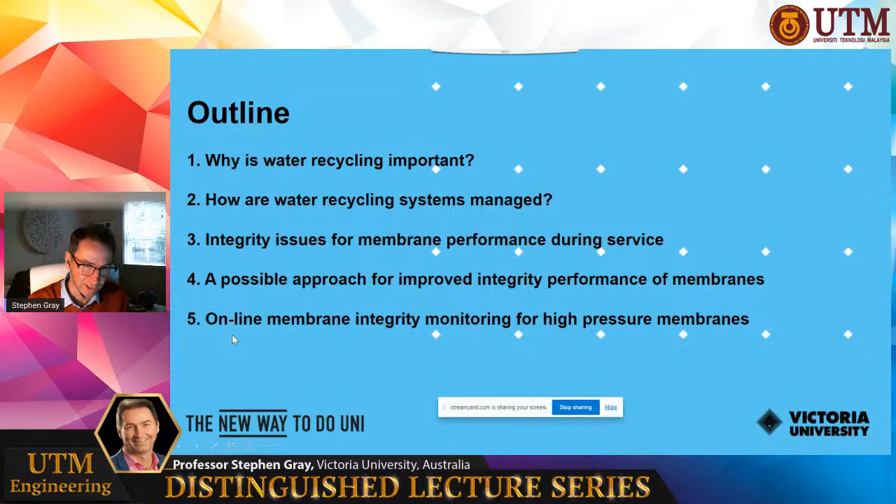So why is water recycling important?

This is the average temperature across Australia over a number of years. You can see from about the 1960s, the blue line shows the temperature across Australia has been increasing. If we do some modelling including greenhouse gas emissions, we get the red line. Without them, we get the dotted blue line. So there's a strong correlation between greenhouse gas warming of Australia and the planet. This data goes up to the year 2000, but more recent data shows it's actually increasing beyond that. We all understand the world is getting a bit hotter, but there's data that underlines that.

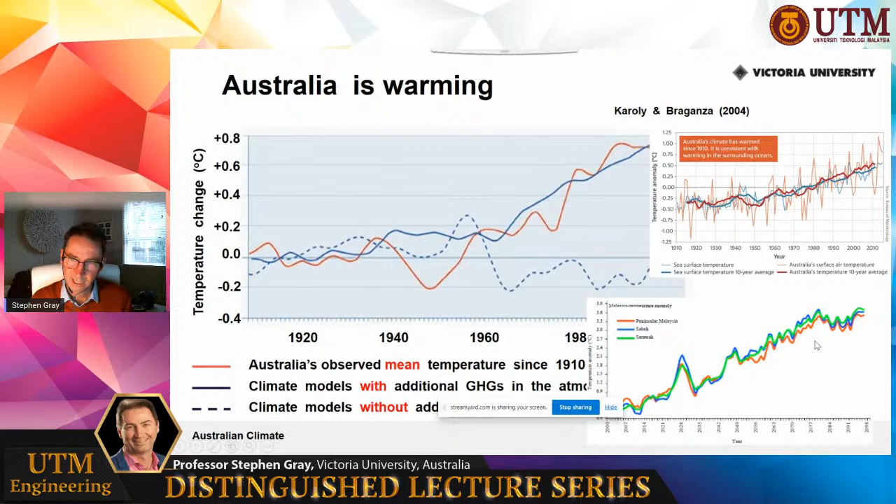If you're in Malaysia, you can see the same sorts of trends occurring, increasing temperature through the years. So we know that the climate of the world is changing.

For Australia, what that means is that the red areas are getting drier and the blue areas are getting wetter. Not everywhere gets dry, but certainly in Australia, all the locations with yellow dots are large urban cities, our main cities, and they're all in regions that are getting drier. So for Australia, climate change means we have less water available. This data goes up to 2002, but with more recent data, shown in green and brown instead of red and blue, you can still see the brown areas are getting drier. Same trend with more recent data.

One outcome of that is we get less rainfall in these areas. This is some data from Perth. You can see what's happened to rainfall there - from about the late 1990s, they've had a drop in rainfall of about 14%, and more recently a drop of 21%, and it might have even dropped again. This data is a little bit old.

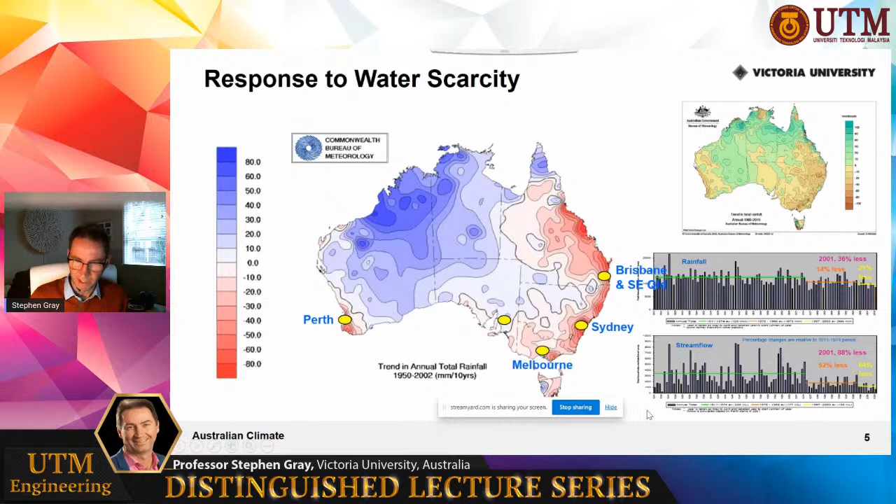What that means in terms of runoff into the catchments, our reservoirs that we've traditionally relied on for water, is that a 14% drop in rainfall correlates to a drop of 52% in terms of water flowing into the reservoir, and more recently a drop of 64%. So our sources of water are becoming less reliable. That's an extreme case, but similar things are happening across Australia in terms of the reliability of our reservoirs.

The response to that, around 2010, a bit before and after, is that Australia has built a lot of seawater desalination plants at all the main capital cities, as well as investing in water recycling. But as the climate continues to change and temperatures get warmer, we expect these effects will in fact lead to more drying of our climate around our major capital cities.

For Malaysia, I was a bit surprised last year when I went to Johor Bahru. I always thought it was fairly wet with a lot of rainfall, which I think it is, but I was told that you'd been buying water from Singapore at certain times of the year. I found that a bit surprising, so maybe water recycling will also be quite relevant to Malaysia. It certainly will be relevant not just in Australia but in many places in the world - the USA and South America have had dry periods, and lots of the world will be investing in water recycling as a result.

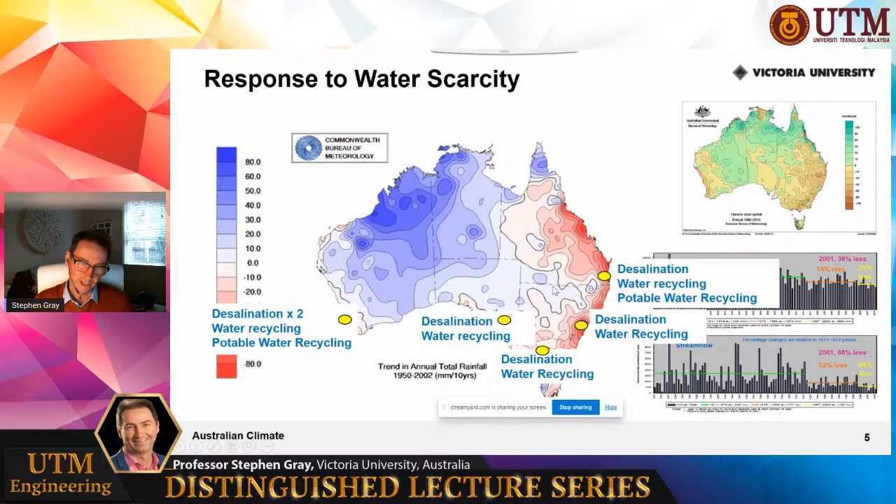So how do we manage our water recycling systems? While what I describe is how we manage water recycling systems in Australia, this is an approach also recommended by the World Health Organization, so lots of places in the world use this approach. It's based on a hazard analysis critical control point analysis, HACCP.

What it relies on is having some knowledge of the bacterial, virus and protozoa loads in the feed water. In this example, you're looking to make the water suitable for drinking in terms of the pathogen load in that water. So you're not removing colour, you're removing bacteria and virus. The feed water quality influences the level of treatment and by your starting feed water quality. If you're using recycled wastewater, you have to have a very high level of treatment to make that water quality suitable for drinking, and we express the removal of those pathogens through a log removal value.

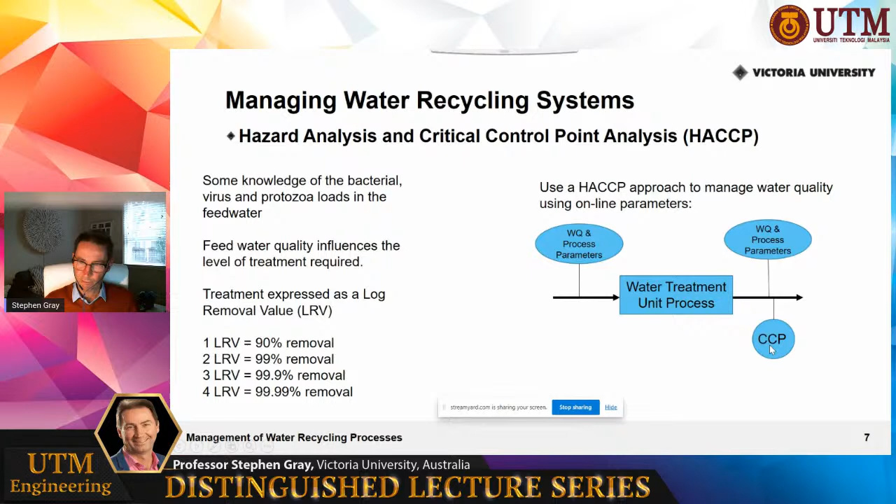So we're measuring these water quality parameters online and calculating what we call a critical control point. We know that if we're hitting that critical control point, the treatment process is working properly. If we think about chlorination, a fairly simple process, our critical control point is the residual chlorine concentration times the residence time.

So that's how we understand that if we want a 4 log removal of virus, we have to hit a certain chlorine residual concentration after a certain residence time. When we multiply them out, we get a CT value, and we know these values from previous research. We can say with confidence that if we're hitting this CT value, we're getting 4 log removal of virus, or 3 log removal, depending on what CT value and log removal we need across that unit process—in this case, chlorination. We know that pH and temperature affect the CT value required.

So we have to measure pH and temperature in line. We also know that the residence time is affected by the flow rate, so we measure the flow rate, and then we measure residual chlorine concentration at the end of that contact period. So we can calculate the CT value from measured parameters online, and from that we can be sure we're hitting the correct log removal value required by the health department. That's an example of how chlorination works.

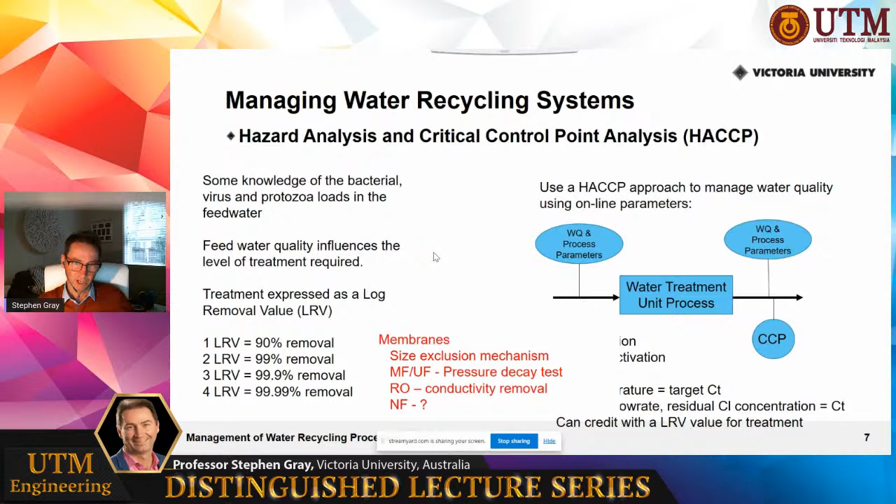When we put a treatment system together that includes membrane filtration, it might look something like this: sewage comes in, we have biological treatment which might give 1 log removal of pathogens, media filtration might give another 1 log removal, microfiltration you might be able to claim 2, but for the high pressure membranes—reverse osmosis—you might get maybe 1 or 2. In here we've said 0, and then you'll have to have some disinfection after that.

So we have to have quite a few log unit treatment processes in order to reach our 8 log removal value—we add up all these accredited log removal values to get our 8. But for high pressure membranes, as I said, we know they can remove virus and bacteria to a very high level, but we can't demonstrate it online, so we can't be credited with those high log removal values.

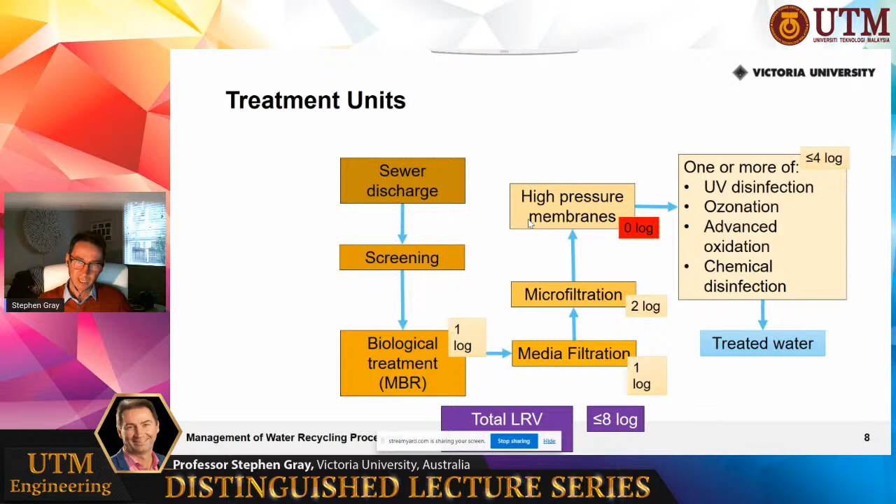So what we would like to do is develop an online membrane integrity technique that gives us verification that the membranes are intact, so we can claim those higher log removal values. This might mean we can remove one of the filtration processes, reduce the amount of disinfection we do at the end of the treatment process, and make the best use of those reverse osmosis membranes in terms of claiming pathogen removal.

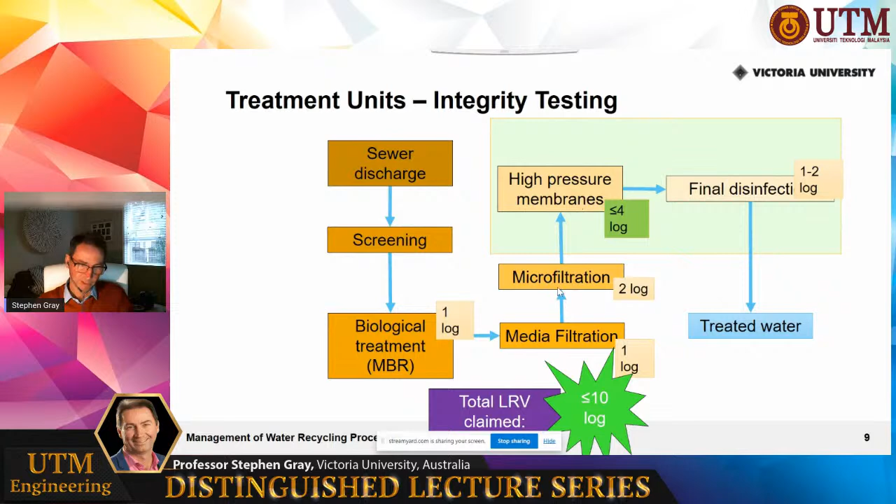I'm assuming we have quite a few membrane researchers online. Quite often in the laboratory we're using nice clean membranes that we may have made ourselves or obtained from a membrane manufacturer, and we might run them for a couple of days and call that a long-term test. But in practice, membranes go into the field and operate for a number of years.

With ultrafiltration membranes, you might be looking to get at least 8 years of service out of them before you change them over, and similarly with reverse osmosis membranes. There's quite a lot of work that goes on by operating plants to extend the life of their membranes, because it ends up being quite a large cost in terms of how it affects the cost of water treatment.

What you can see here is that during service they get exposed to some quite harsh conditions. You might be familiar with nice clean membranes in the laboratory, but once they've been in service, and you might have been operating with coagulation before the membranes, you can see there's the potential for those membranes to be exposed to very high concentrations of solid particles. So you get abrasion of the membranes, potential breaches may occur, etc. During their life you have to treat them nicely to actually get that 8 years of service out of them, because the conditions under which they operate can be quite severe.

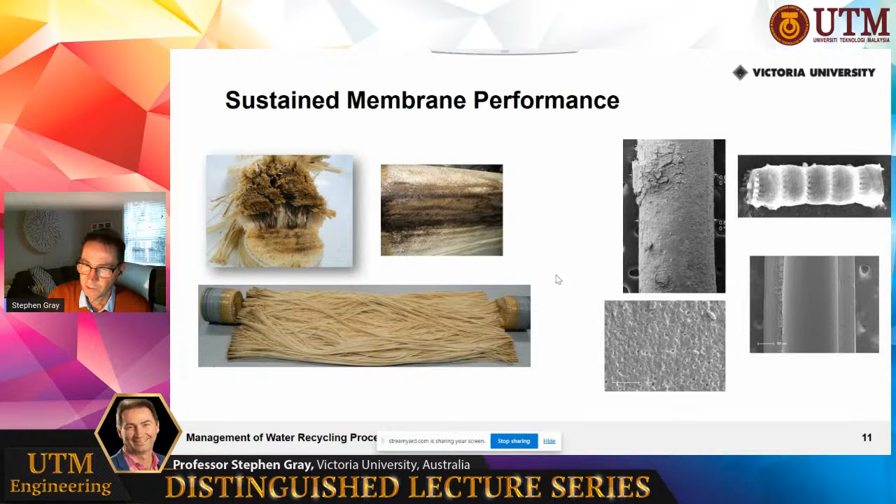And you can see high levels of fouling occurring on the surface. These are membranes where we've done some autopsies on them after they've been in service for a period of time.

Here's an example of what can happen to ultrafiltration membranes operating on a water recycling plant. This is a particular example where the membranes were showing loss of integrity at quite a high rate. When they were new, these UF membranes could claim 3 to 4 log removal of virus based on an MS2 challenge test. MS2 is a bacteriophage, similar in size to a virus but not as infective. This is what we would typically use to challenge a membrane to verify virus removal.

These membranes did not fail a pressure decay test, which is routinely used to check them when in service. But despite that, they were showing a loss of 1 log removal value for virus each year. In this case, the health department made them do a challenge test with MS2 each year, not just when they were put in, to verify that they were retaining their log removal value for virus. When they did that, each year they found they were losing one log removal value.

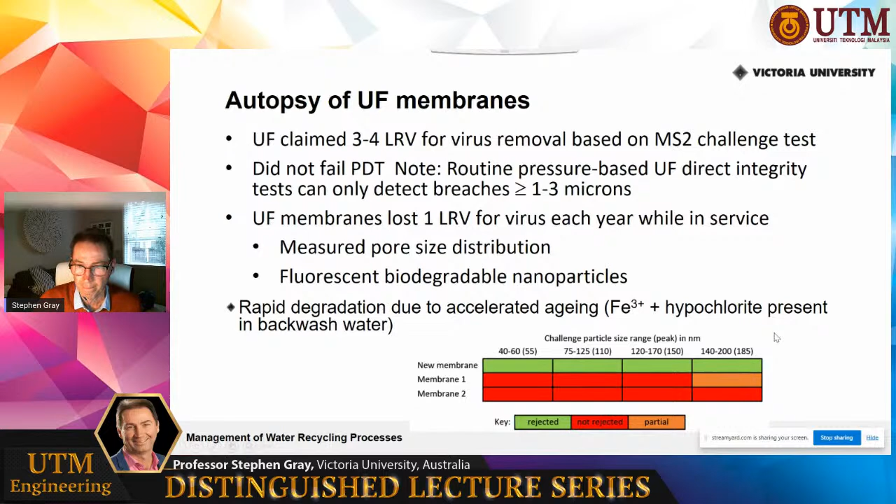So quite a lot of membrane researchers make new membranes, but quite often we focus on flux and rejection and not so much on improving membrane integrity. So this is just to give you an example of some work we did on nanocomposite membranes for improving the physical durability of UF membranes in this case. So this was our PhD student, Jessica Lai, and there's some of her publications from that.

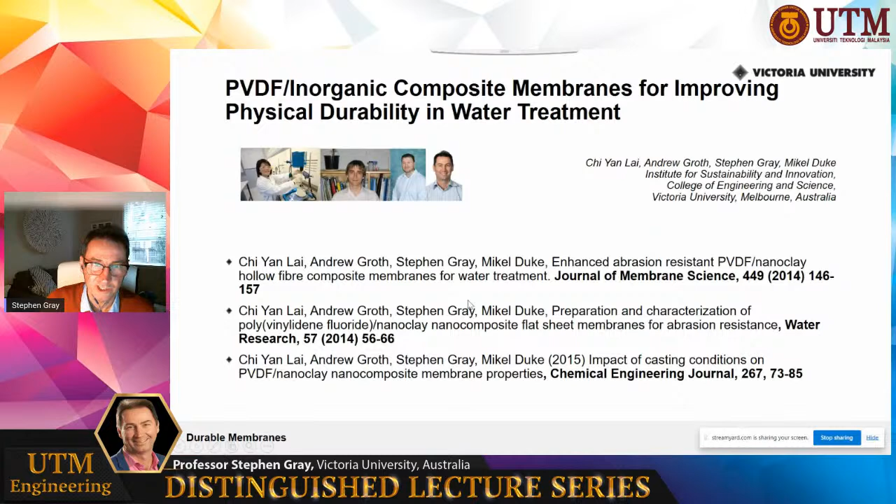But really, I suppose I'm just showing this for researchers to think about, maybe one of the things they should be optimizing for is not just rejection and flux, but also wear resistance, or perhaps mechanical strength properties, which can go some way to indicating an improvement in potential integrity of the membranes over their service life.

So what we were doing here was making some nanocomposite UF membranes of different compositions, and then putting them through a wear test. So we just make a little loop and then seal them, so then we could do a bubble test, which gives you the maximum pore size, and then we'd put them in a slurry of silicon carbide, and we just put them in a shaker like that.

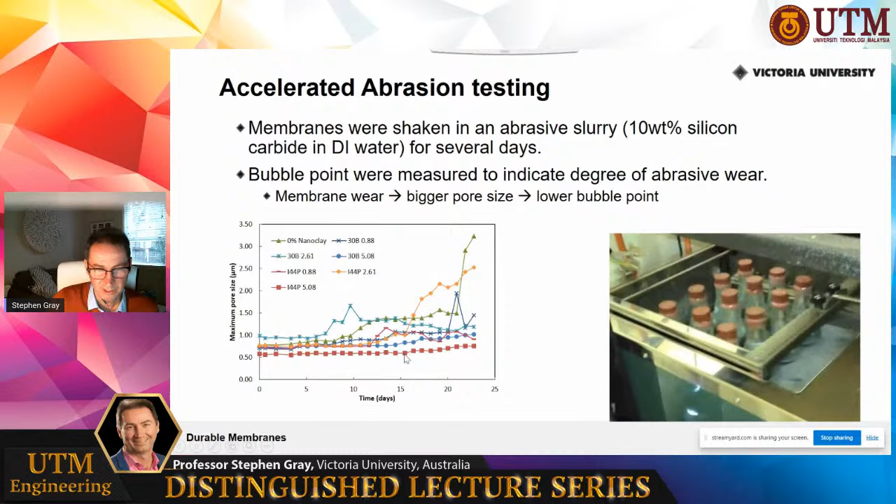So a very simple test, and that leads to abrasion of the membranes, and we can track the bubble size over time, and eventually when it abrades away, we get an increase in the maximum pore size as measured by the bubble point. So a fairly simple test, and one which we could use then to optimize on the addition of nanoparticles to prevent or reduce the rate of abrasion of the membrane.

So we know from nanocomposite research that actually adding nanoparticles to a polymer can actually improve their wear resistance and also their mechanical properties. And what we're doing here is just demonstrating that for membranes as well.

So using that technique, we could show that without any nanoclay, so we're adding nanoclay, we could operate for 6 days before we started to see an increase in the bubble size. Once we started to add nanoclay, we got an increase, and it was about 3 times longer that we could do that wear test for before we saw any increase in bubble point. So quite a significant increase in wear resistance.

And just to emphasize that, here you can see what happens with the membrane with no nanoclay. This is before we do the abrasion test, and this is afterwards. When we have the nanoclay, this is before, after. We can see some wear, but nowhere near the extent of what we see with the membrane with no nanoclay in.

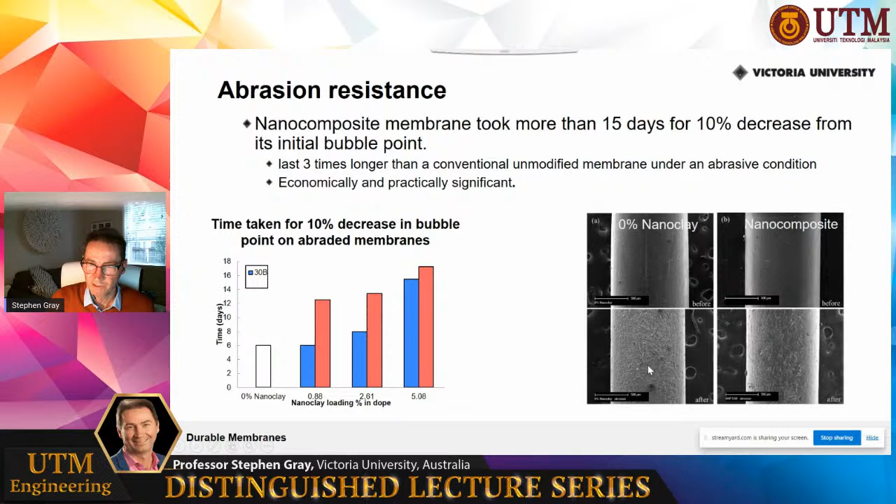So just another approach to improving membrane characteristics, but not focused on flux or rejection, but focused on their mechanical properties and their wear, because we know that will relate back to their service life and their ability to retain integrity throughout their life.

And this is just a proposed mechanism as to why that occurs. So we're using PVDF membranes with nanoclay in. When you're getting them wearing and you've got the nanoclay, then you've changed the crystalline phase of the polymer. So you have more beta phase present, which is more resistant to abrasion. You can have nanoclay exposed at the surface, which is more resistant to further wear. And if you have crack propagation, then the nanoparticles can help stop that propagation of the crack. So there's a few reasons why that can occur.

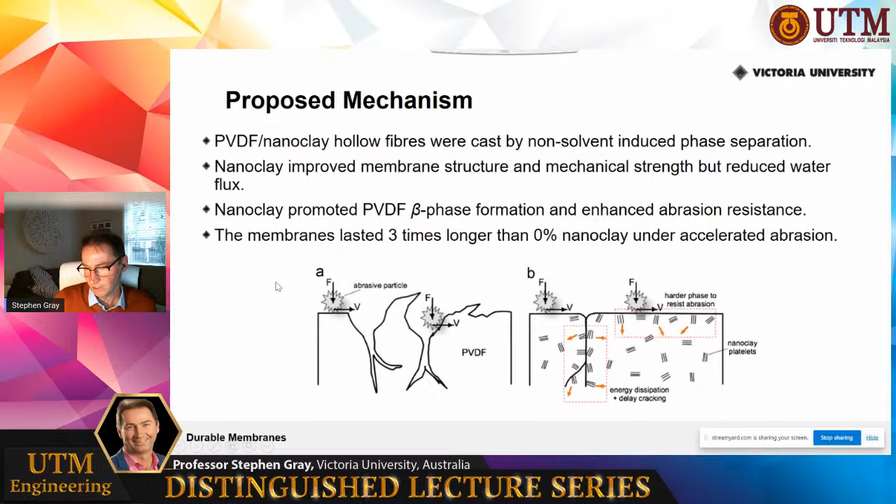But it's really just highlighting that sometimes we think a lot about flux improvement and rejection improvement, but not so much about abrasion resistance or some of the mechanical properties of the membranes, which can also be important and certainly have a big effect in terms of the cost of treatment if this leads to extension of their service life.

Okay, so I'll talk now about some of the work we've done around online membrane integrity monitoring of high pressure membranes. So we've had a number of projects here, some with Water Research Australia, some with the Water Reuse Foundation in the USA, and that was the work we did with Professor Joe Jacangelo. And these are all based around use of some nanoparticles and comparing these nanoparticles with other techniques that we might use, such as dyes.

What I showed before with the example of the membrane that had accelerated aging and wear and loss of integrity, we also did some work around membrane integrity monitoring for ultrafiltration membranes, which I won't really go into, but in that case we were making polylactic acid nanoparticles, and they're inherently biodegradable, so they undergo hydrolysis. So you can see that they don't stay as nanoparticles for very long.

So it's after 180 days, and that's one of the characteristics that we would like, that the nanoparticles don't foul and they don't stay in the environment for terribly long, because people worry about these things getting into the drinking water. And so we need to have them being biocompatible. Polylactic acid is biocompatible. We're making them fluorescent through the use of curcumin, which comes from a plant. So we use that anyway in cooking, so it's food grade material.

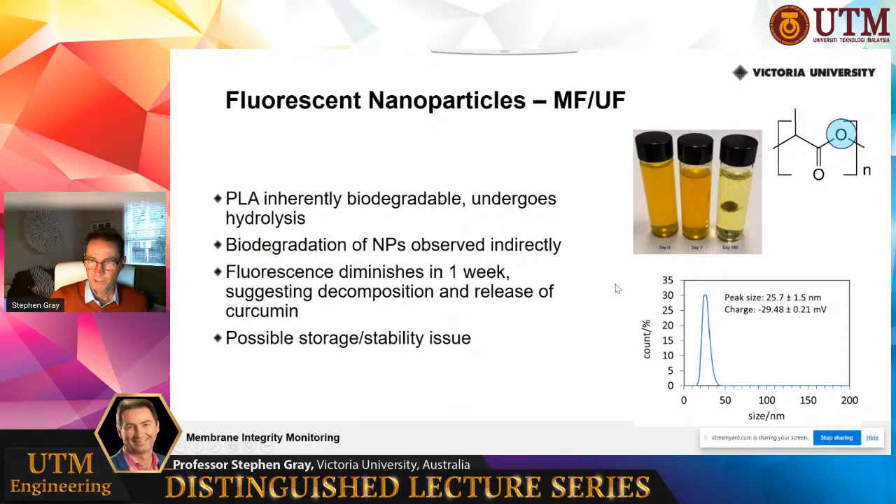But for reverse osmosis membranes, what we're setting out to achieve is a log removal value of 4 or greater. So we would like to be able to verify that the membranes have a log removal value of 4 or greater in an online environment. We can do this currently using a dye called rhodamine WT. But if we're just relying on conductivity or TDS measurements, then usually we're less than 2 log removal. So as I said previously, this is not a very good outcome for reverse osmosis membranes when we know they can do a lot better.

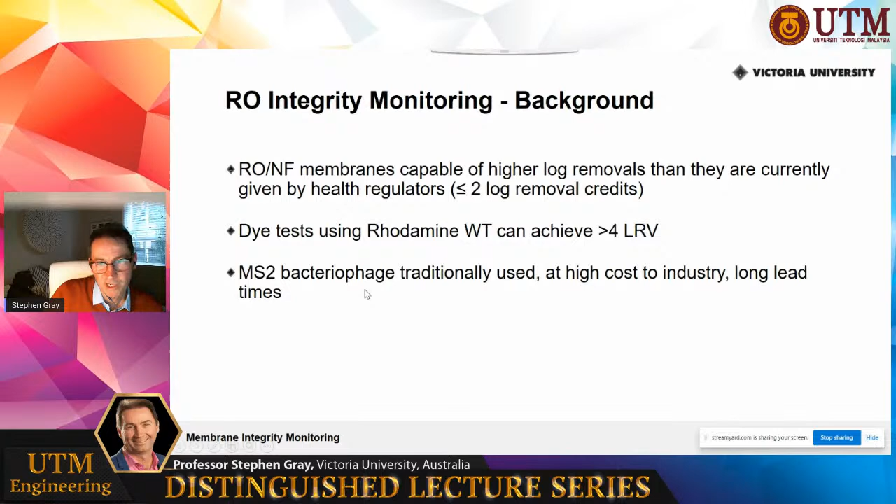I also mentioned that MS2 bacteriophage are traditionally used by health departments to verify the integrity of membranes, UF membranes and RO membranes, because they're similar size to virus, so that's what's used. We can use other types of tests to verify the performance. So we can do a direct integrity test like a pressure hold test or a vacuum decay test. They need to be done offline, so they can't be done online.

And again, they're not very sensitive because you have to go to very high pressures to really get down to detecting a breach that would be the size of a virus particle. So not really useful for us to do an online test and be trying to detect virus removal across the membrane. Similarly, there's some indirect tests like particle counting and turbidity monitoring. They're less sensitive, so we can't get up to the 4 log that we would like. You know, they're getting down around the 2 log again, but we can do some challenge testing.

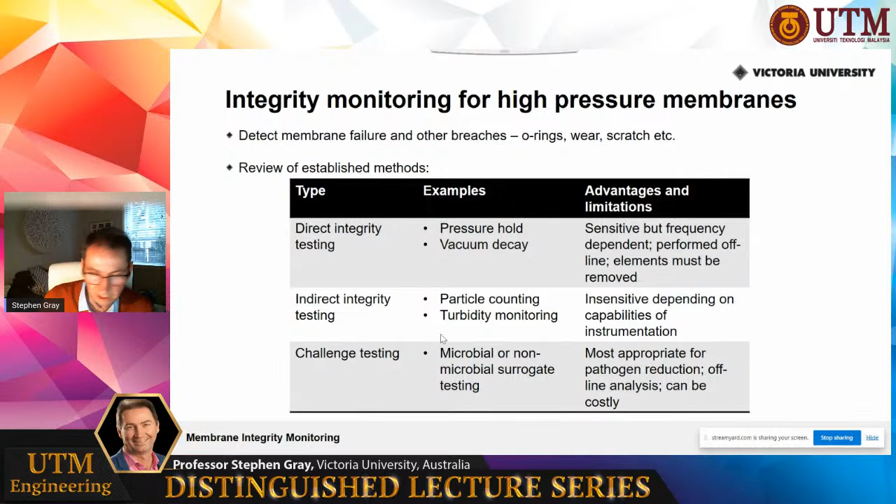So this is using the MS2 or the rhodamine WT. So we're having to add something in the water and then detect it on the permeate side of the membrane. And that generally gives us the highest level of log removal value that we can verify across the membrane. The challenge for us was to establish a representative LRV. So we wanted something that could be easily rejected by the system. So it should be similar in size to virus, which is the smallest of the pathogens. So something like MS2, or there's some even smaller viruses than that, around 30 nanometers in size.

Some of the dyes are quite smaller than that, so they tend to be in the hundreds of molecular weight size compounds. Tests should be operated at the maximum operating flux, so where the membranes are most stressed, to ensure that even under the harshest conditions we're getting good rejection. And we've got to be able to detect very low concentrations of our challenge particle in the permeate.

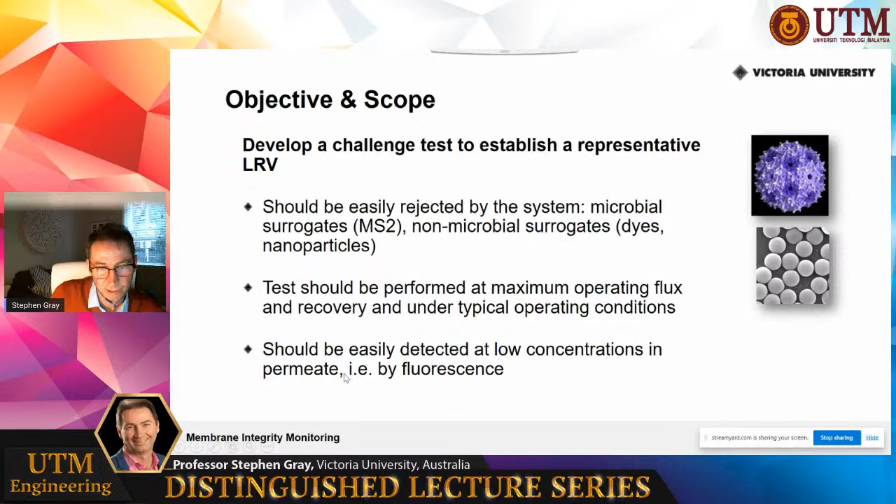So if you think about detecting 4 log removal, that means you're rejecting 99.99% of what you put in. And we can't afford to put in very high concentrations of these challenge particles into the feed water because then it becomes too expensive. So typically we're looking to get a treatment cost of 1 cent per cubic meter or less, which means we're really limited to about 1 milligram or maybe 10 milligram per litre if we're adding continuously.

And so what this slide is showing is that if we're adding 1 milligram per litre in the feed, then to get a log removal value in the permeate, we're having to detect down to 1 nanogram per litre or less in order to be able to do that. So you need something which you can detect at very small concentration. So you need a very sensitive detection system, and that's really critical to verify these high log removal values.

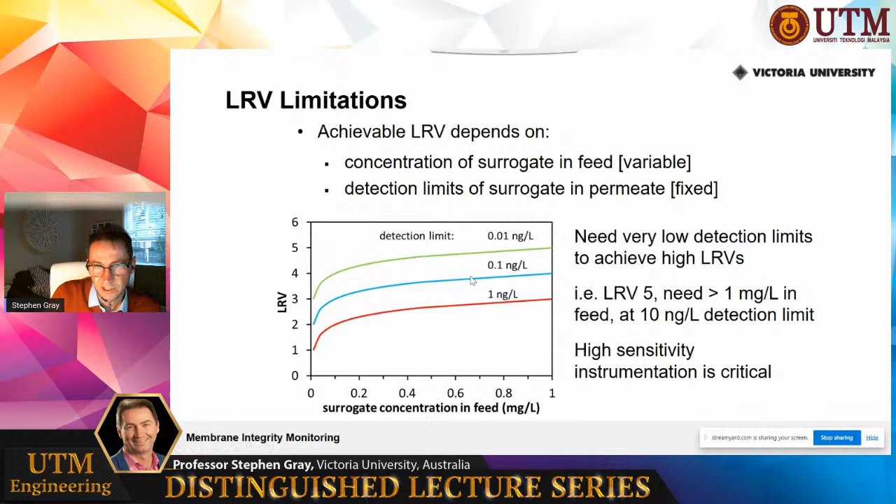So for the selection criteria, it has to be similar size, similar shape to virus. As I said, it has to be detectable at very low concentrations, and has to be stable under the operating conditions. So for fluorescence, we know that's affected by salt concentration. So if we're using RO membranes, then we can get quenching of the fluorescence. So we may have to make some correction for that, or it may make it not a very good test. So it may not be accurate.

We don't want it to react with anything. Certainly it should be non-toxic. We don't want it to foul the membrane, so non-absorption. And as I said, very inexpensive. So quite a lot of challenging criteria for us to aim for.

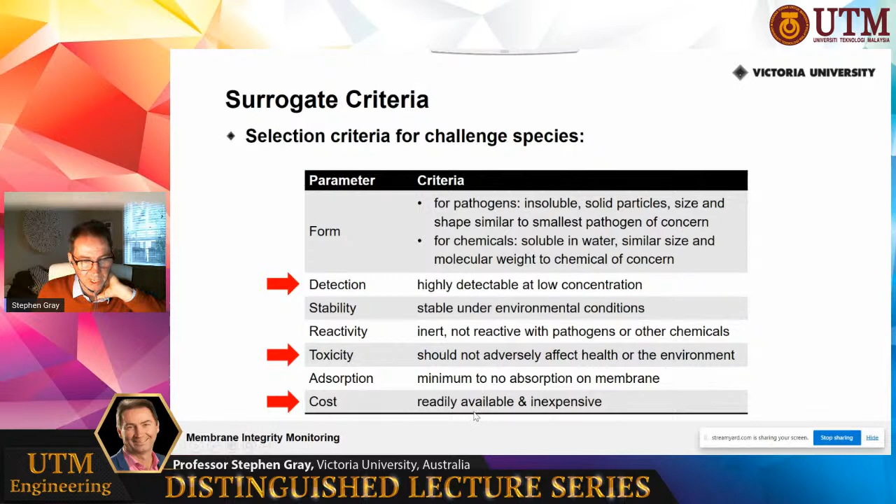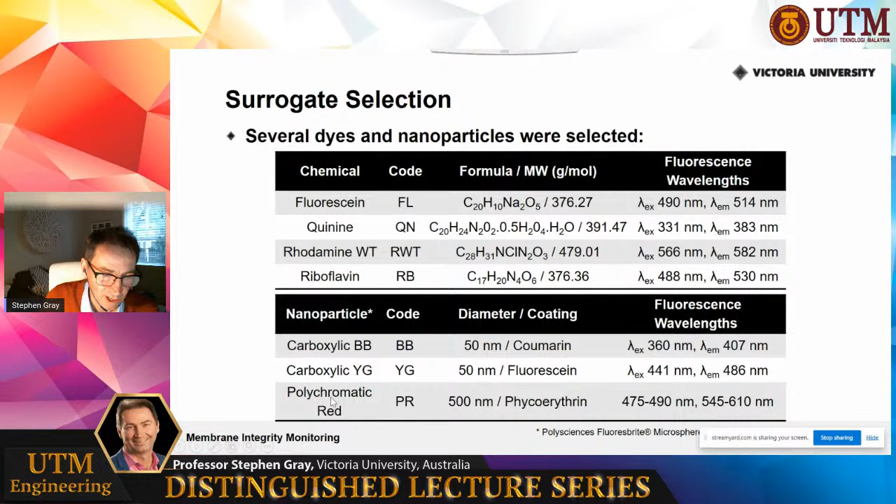Here in this first bit of work, we looked at a range of dyes, the main one being rhodamine WT and some other ones there, and also some commercial nanoparticles that had a fluorescent dye tag on the outside. And we screened them over a range of operating conditions. So as I said, the salt can quench fluorescence, so we wanted to have a look at that.

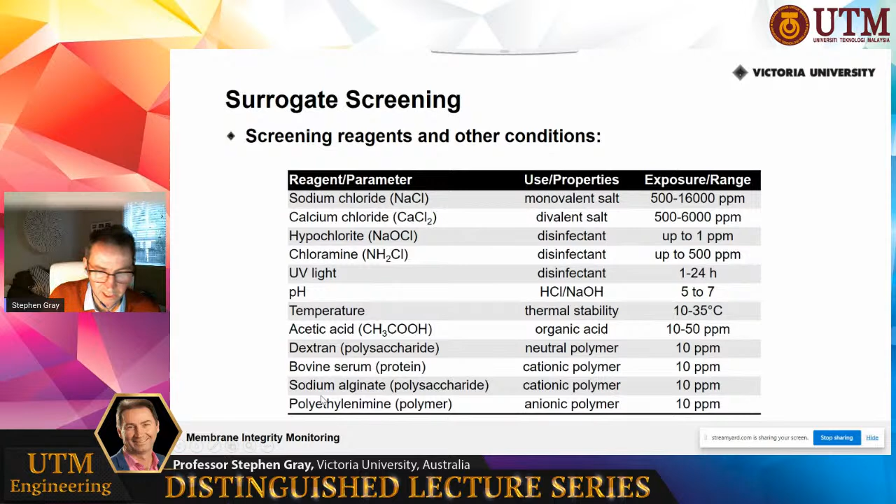You might have oxidants in there which can also start to decompose the dyes or the nanoparticles, as can UV light. And then if we get fouling on the membrane, we can also potentially see some interaction between the fouling layer and the compounds that we're adding. Key findings for this were that rhodamine WT was certainly better than those other dyes that we used, and a lot better than the commercial nanoparticles.

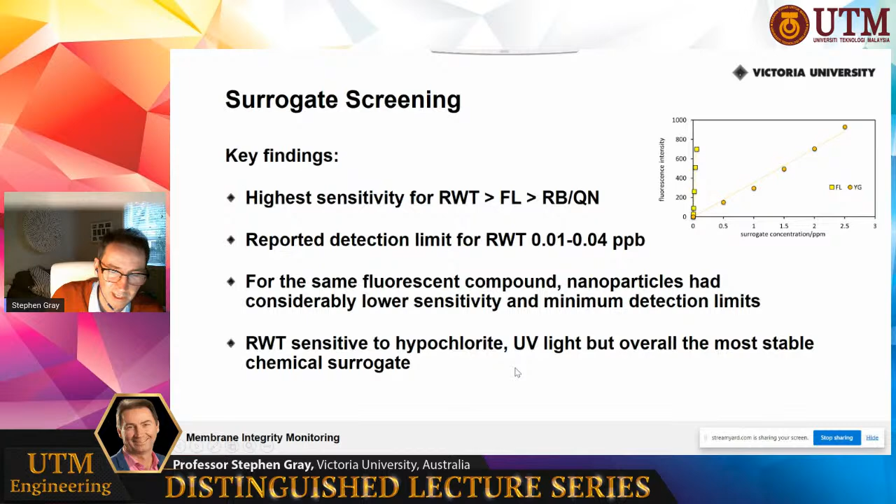There was also some interaction with hypochlorite for some of them, but rhodamine WT was sensitive to hypochlorite and UV, but not really sensitive to pH or conductivity, so the amount of salt in solution. So from that perspective, it was very stable.

So that was promising. If we do some bench scale testing, with the nanoparticles we could really only get a log removal value verification of about 1 to 2 log removal values, so not very good. With the rhodamine WT, we were able to get it up over 4, and we tried that on some compromised membranes, and we could detect differences, regularly getting between 2 and 5 log removal values detected. And this is for reasonable concentrations in the feed stream of rhodamine WT, so in this case, 5 parts per million.

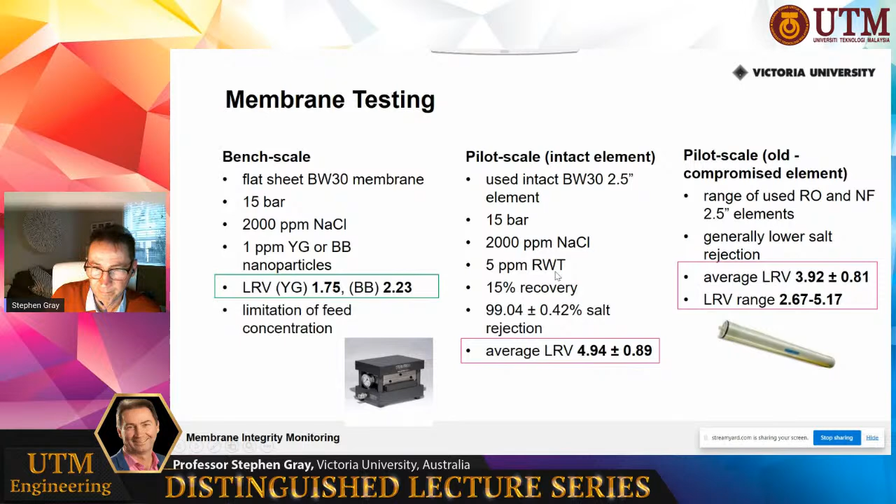In order to get the amount of rhodamine WT down, we thought about doing a pulse test. So when we do a pulse test, we can add a higher concentration of the dye or the challenge particle in the feed, and that way we have a higher concentration going through, and we can get more sensitivity in the rejection of that compound across the membrane. So we're measuring the amount of, in this case, rhodamine WT in the feed and the amount we detect in the permeate, and calculating a log removal value from that.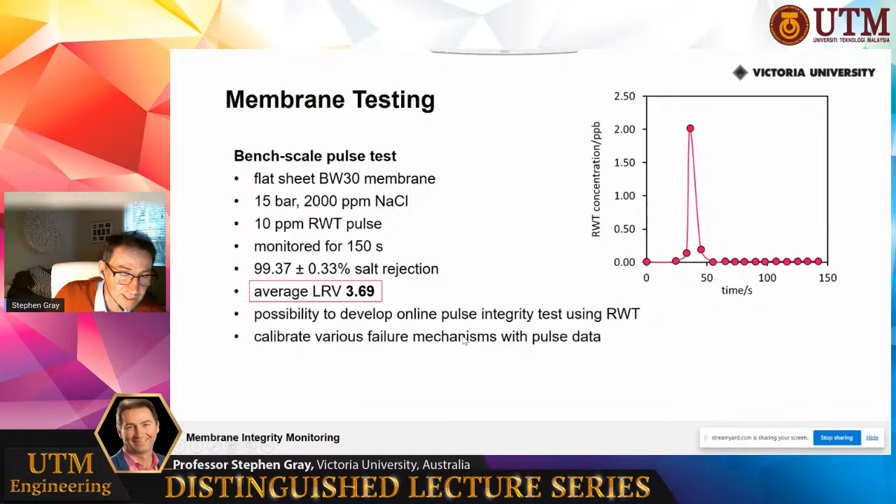So in this case, we're thinking we might only do the test 3 or 4 times a day. Not as good as continuous online detection, but similar to what we currently do with the pressure decay test for UF membranes, where we might do that once a day on an industrial scale.

What that work was showing is that rhodamine WT was quite good in terms of performance for what we wanted to achieve. Where it wasn't so good is there's no true surrogate for virus, so it's very small compared to a virus. If we think about the way reverse osmosis membranes deteriorate, one way is through aging of the active layer, and they start to let more salt through as their pore size gets a bit bigger. It only has to get large enough to let through the dye to now start registering low log removal values, whereas that deterioration of the membrane may not be sufficient to really let through virus. So it depends on how the membrane's starting to fail.

The nanoparticles are more realistic in size to that of virus or the pathogen, but they're very expensive, have lower stability, and weren't so good to use.

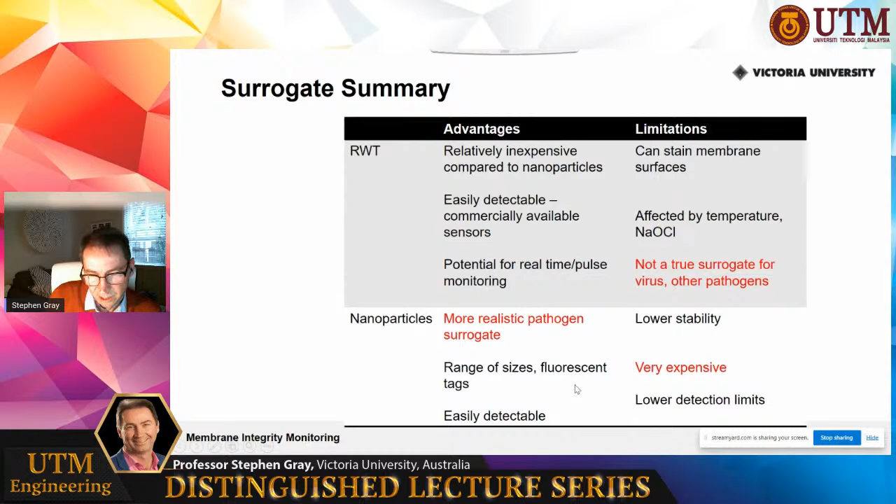One of the things our colleague Eddie Stasovich did was make some other nanoparticles with some unique optical properties, and we could use a different technique to detect them. It was an optical technique which could demonstrate up to 7 log removal value with relatively low concentration, in that 1 to 10 milligram per litre range. And certainly the cost of making them was nowhere near the cost of the commercially dye-tagged nanoparticles. So this is something we're investigating for commercialisation and looking to do some full-scale trials on.

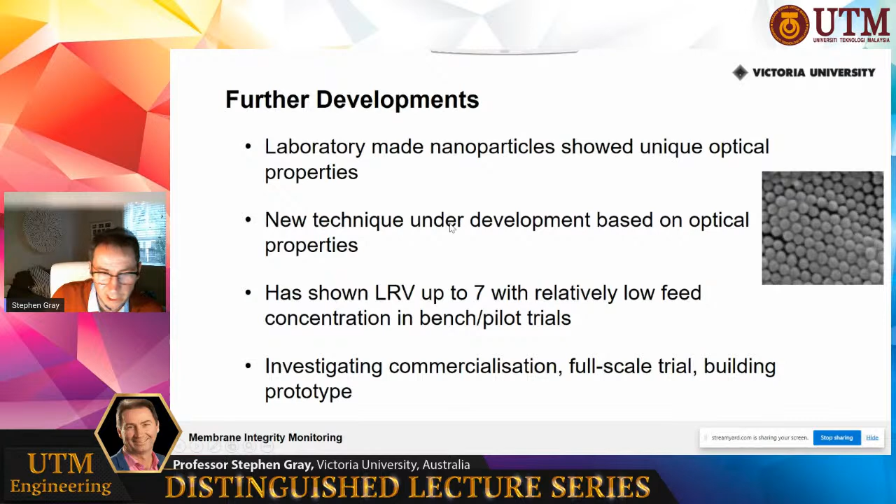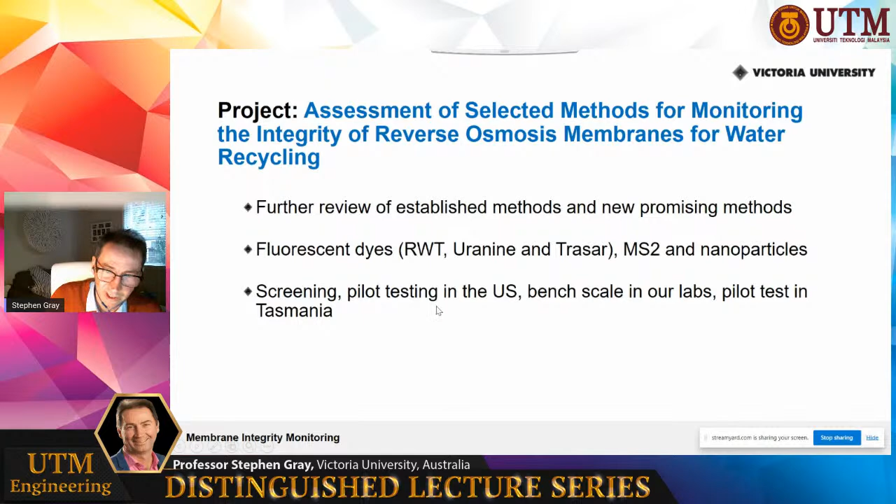So we did some additional work with Joe Jacangelo in the US on rhodamine WT, and then some different dyes: uranine, which was one that UCLA had looked at, and then Trasar, which is a commercial dye used for membrane integrity monitoring, sold by Nalco. And so that's another dye that's in the market. We compared that with MS2, which is the traditional standard, and our new nanoparticles. We did some pilot work in the US and then some in Tasmania as well.

So this is just a bit of a look at if we didn't want to add anything to the water and just use water quality parameters, what we could actually expect to achieve was no greater than 3, and most of the time around 1 to 2 log removal value. Some people do use sulfate, which isn't shown here, and with certain wastewaters you can get up to 3, but it's very dependent on the concentration of sulfate coming through in the wastewater. It's also done offline, so it's not something you can do online. So we didn't think that was a particularly good technique.

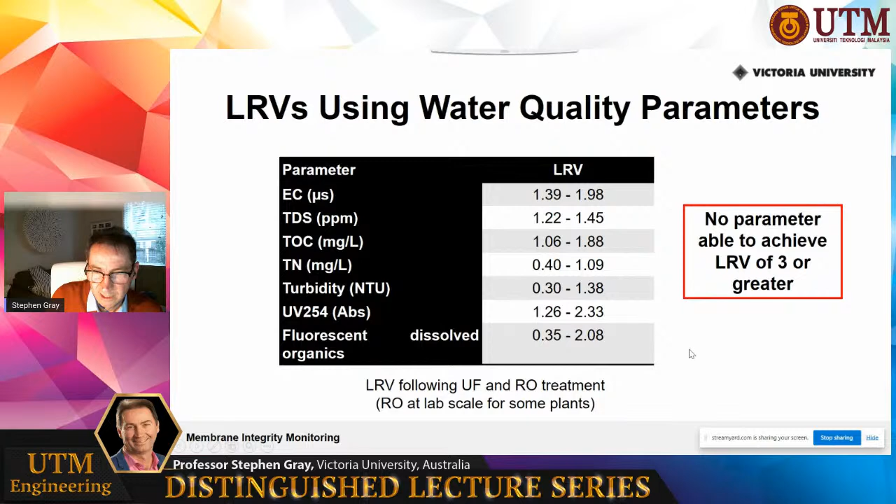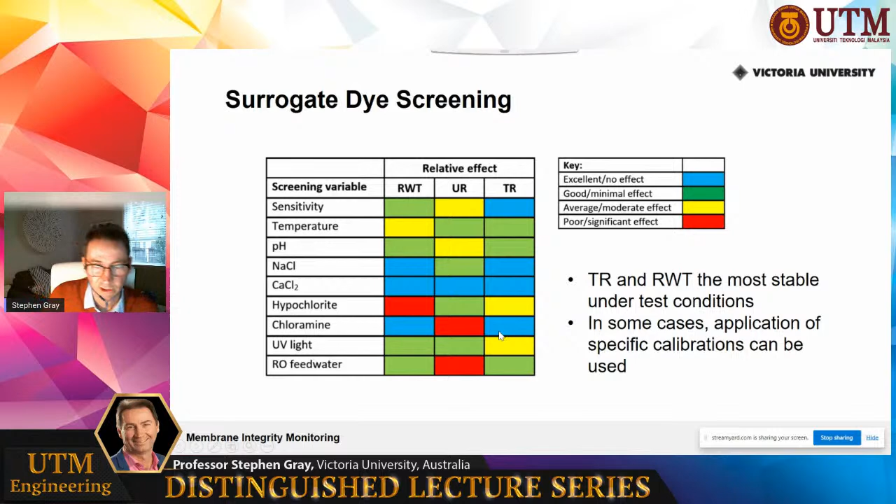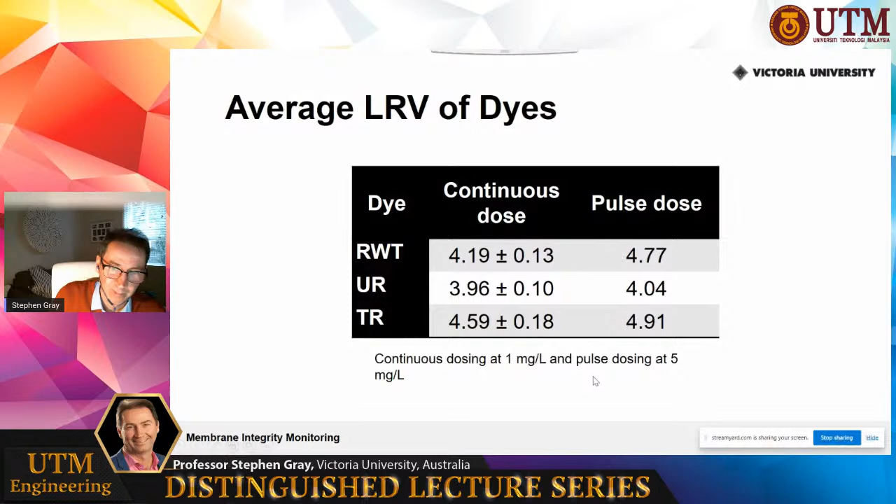We did some bench scale testing, and certainly the rhodamine WT and Trasar gave us higher log removal values that we could detect compared with uranine. When we did the pulse test, again we can see increased sensitivity doing that, using a pulse dose of 5 milligram per litre.

When we did the pilot scale test in the USA, we used 4-inch membranes, some Dow Filmtec brackish water RO membranes, and a ZAPS detection system, challenging with MS2, conductivity, and in this case Trasar - we did try the other ones as well. I'll just show the Trasar results and our nanoparticles.

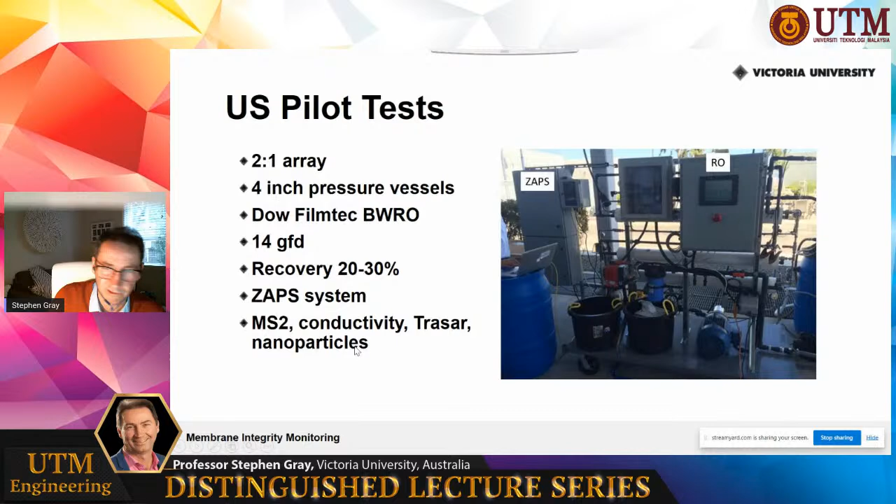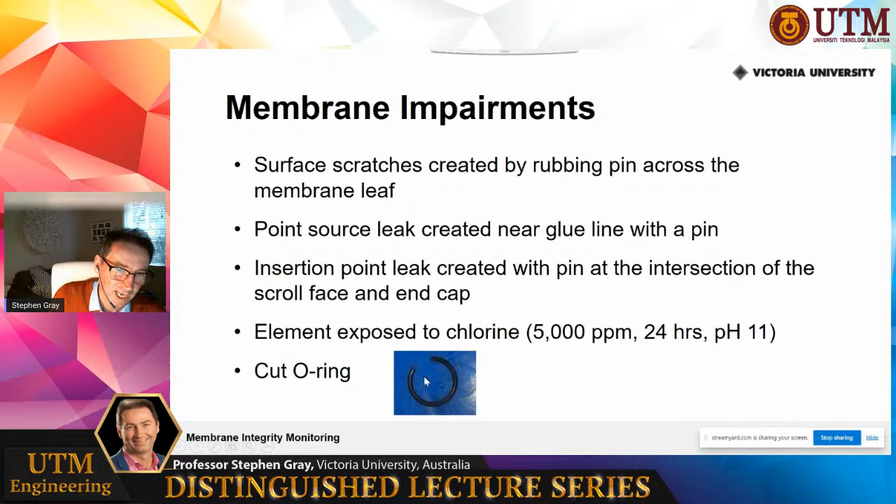When we did this test, we got Dow Filmtec to make some membrane modules with defects in them. So we had one with no defect, one with surface scratches, one with a point source leak that was made, one with an insertion point next to the pin. Then we exposed one to chlorine to wear down the surface of the membrane, the active layer, and start to get some TDS coming through. And then we also cut an O-ring - O-ring failures are actually one of the common failures for RO membranes.

So here you can see the results of that. We're comparing MS2 in the blue, conductivity verification in the red, and the Trasar dye in the green. MS2 is our gold standard - we know it's similar in size to virus, and we believe it behaves in a similar way to virus. We can detect high log removal values with it, in fact higher than the other techniques.

And while we can detect it with that, we're not keen on using that all the time, because you have to grow the bacteriophage up in the laboratory. You have to take them back to the waters, back to the laboratory to do the detection of the concentration. So it's quite a laborious approach, and we've had some cases where you can't rely on the laboratory to deliver the bacteriophage when you want it, because if they have some problem in the laboratory, they actually can't grow it up in time. So not easy to use as a regular monitoring technique, but certainly when we're able to use it, it's the one that we think delivers a rejection value similar to virus.

You can see with the red ones, with conductivity, always extremely low compared to the MS2, so it's a very conservative measure of integrity. And you can see with the chlorine damage, we're letting through most of the conductivity, but our rejection of MS2 is still quite high, up at 5 log removal values, so not really giving us a good demonstration. In this case, we would be saying we need to get rid of the membranes, whereas we're actually getting good pathogen rejection.

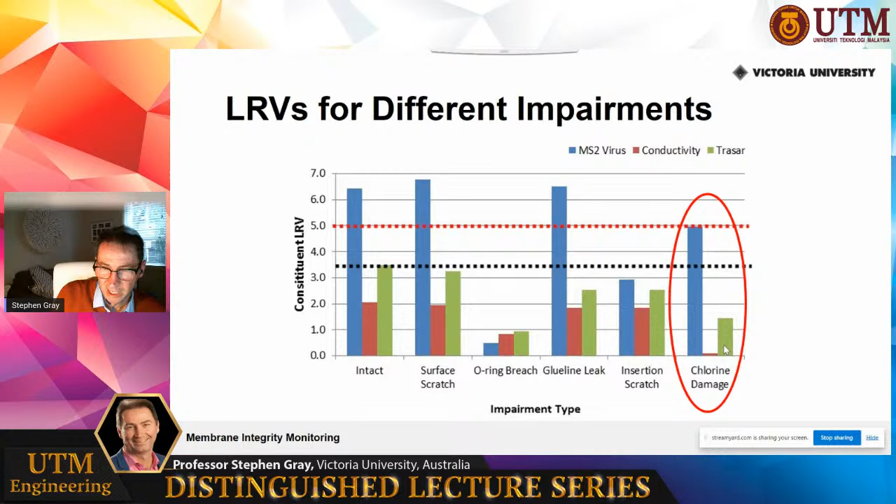It's still conservative against the MS2, so we don't want it to be showing a higher log removal value than what we get with the MS2, because then it would be giving us more confidence in the membranes than what we should have. And even with the chlorine damage, we're getting some rejection. What we would expect if we did a nanoparticle test on this arrangement, where we've got the chlorine damage, is that we would get something more similar to the MS2 than what the dye is giving us, because the nanoparticles are a larger particle and can be more easily rejected.

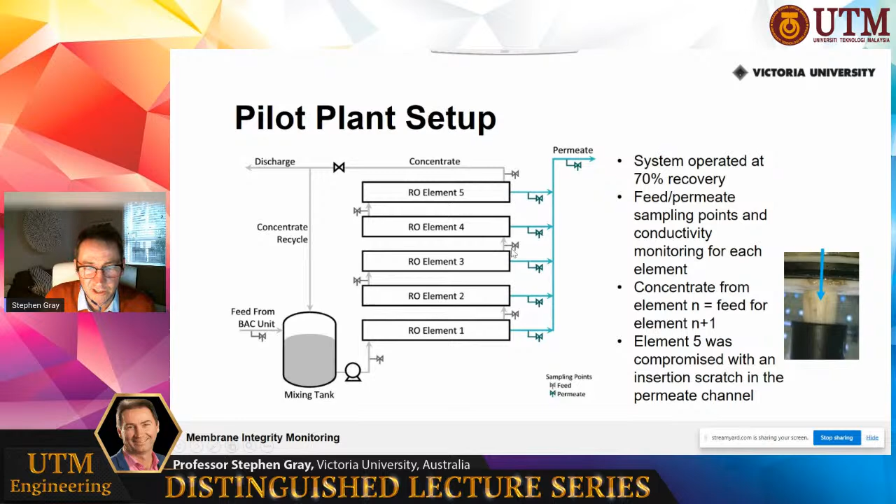We also did something similar on a pilot plant in Australia, again with some mixed dyes, and I'd better hurry up. Here just showing the arrangement. So we had some reverse osmosis elements, and we could detect rejection across each element and across the whole array of elements. And again, these were all intact except one had an insertion scratch.

This is comparing the three dyes, the Trasar, the uranine, and the rhodamine WT. What it's showing is the rhodamine WT had the best sensitivity, so it always gave us the higher log removal value. So we were thinking that's the best dye. Nalco, when they sell their Trasar, they also like you to use their detection system. We weren't using it, so maybe they can get better detection with their system than what we could. But we generally saw lower log removal values than the rhodamine WT.

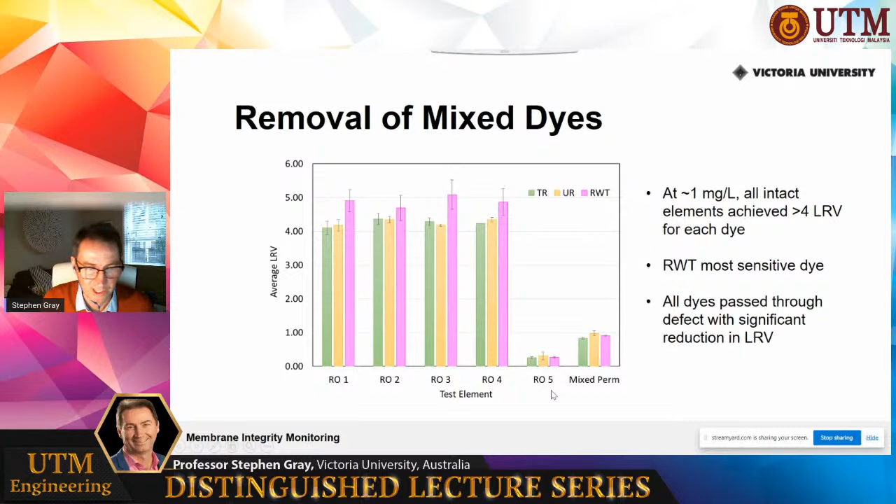And when we have the insertion scratch, we see the decrease in all the rejections there, so low log removal value. When we compare that with the MS2 and nanoparticles with rhodamine WT, again we see the MS2 gives us the highest log removal value. So the dye and the nanoparticle are more conservative, which is what we want, but we'd like them to give us the highest log removal value that we can. And we can see with the nanoparticles, we're actually getting better performance than the rhodamine WT in terms of being able to verify the log removal value across the membrane.

Not only do we get the high log removal value, but we see lower error. So you can see with the error bars, these are repeated tests, and we can see greater variation with the rhodamine WT than what we see with the nanoparticles. So quite happy with the performance of the nanoparticles.

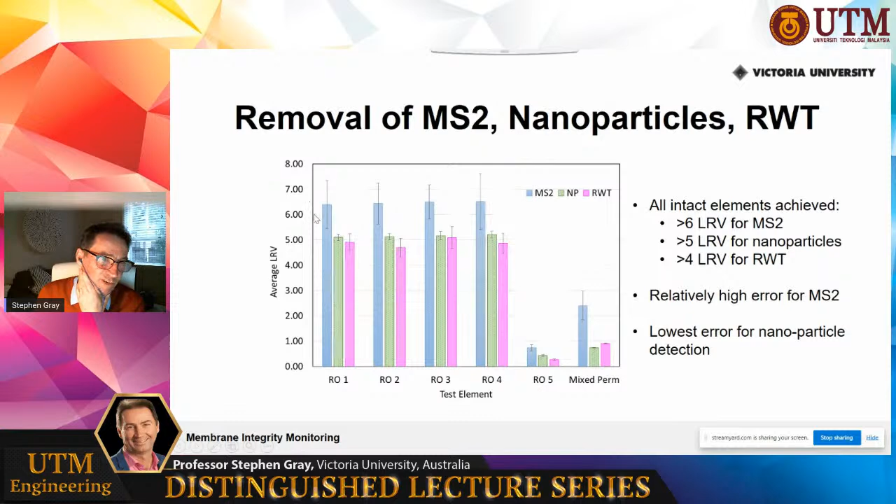And so here you can see we're getting MS2 around 6, and with the dyes around 5. We're using conductivity during those tests, and when we're measuring that, you're only getting around 1.8 log removal values that you can use for verification that the membrane's intact. So you can only be credited with that value.

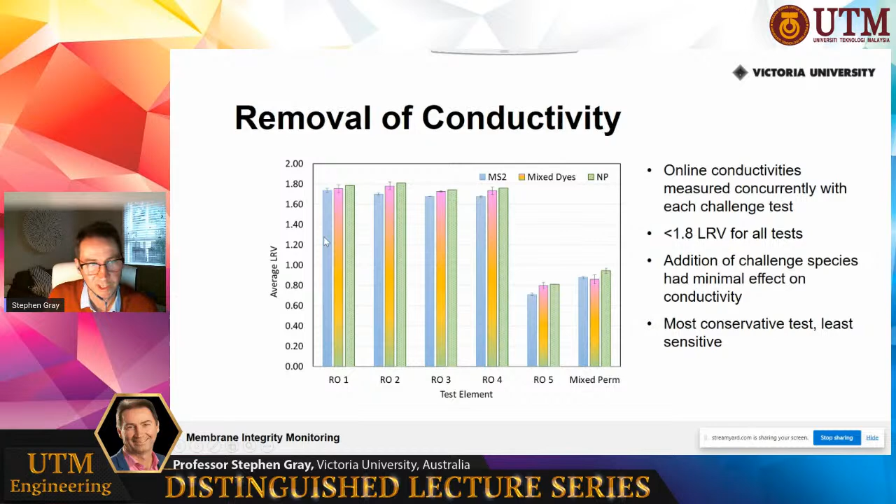So very low. In summary, the Trasar and the rhodamine WT were capable of giving high log removal values at the bench and pilot scale. The pulse dosing gave us slightly higher log removal values that we could verify than the continuous dose, but you do need to put higher concentrations in the feed, so you can only use that intermittently. The pilot scale test results resulted in LRVs for MS2, nanoparticles, and rhodamine WT that were quite high, but much lower for conductivity.

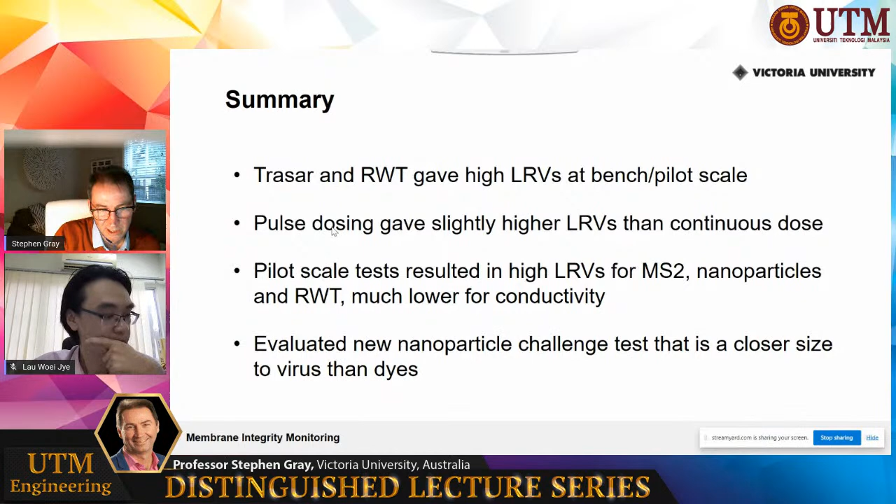And the nanoparticle that we're using is around 30 nanometers in size, so much closer to the size of a virus than dyes.

But overall, I think water recycling and the need for water recycling will continue to grow. Climate change is happening, and it is affecting our water resources, so expect to see growth in water recycling. Membranes will be important in that process because they can be used efficiently to remove pathogens. To get the best out of them, we need good integrity and good performance during service, and that means their mechanical properties and their wear properties become quite important. So something as researchers that we probably haven't focused on much, but something which is very important.

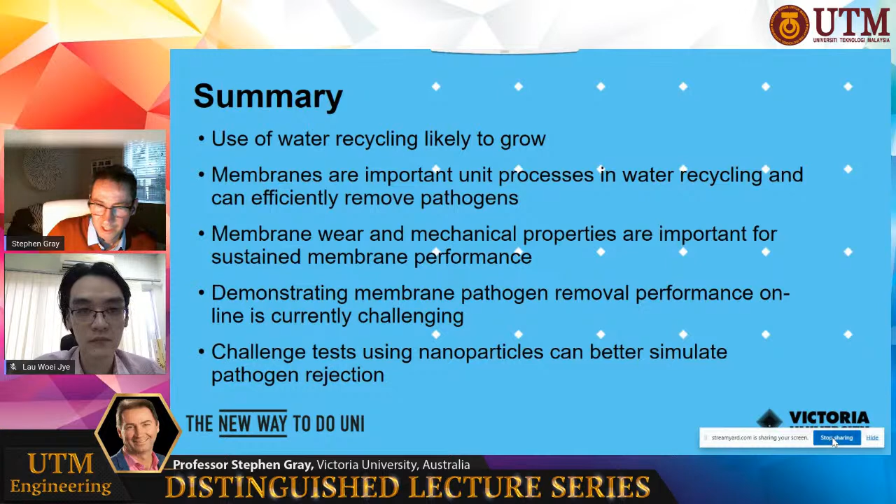We've been demonstrating the membrane pathogen removal performance of online techniques, and it's currently challenging, but we think the use of nanoparticles can better simulate those pathogens and give us an online technique to verify those high log removal values that we know an intact membrane can achieve. So thank you very much. I think I've gone over, but I'll hand you back to Dr. Lau.